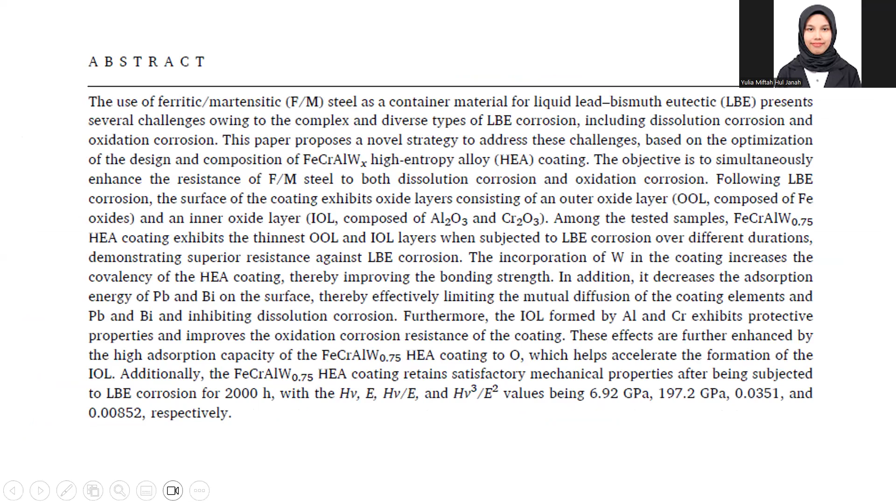About the abstract: the use of ferritic martensitic steel as a container material for liquid lead bismuth eutectic (LBE) presents several challenges owing to the complex and diverse types of LBE corrosion, including dissolution corrosion and oxidation corrosion. This paper proposes a novel strategy to address this challenge based on the design and composition of a ferrochromium aluminum tungsten high entropy alloy (HEA) coating. The objective is to simultaneously enhance the resistance of FM steel to both dissolution corrosion and oxidation corrosion.

Following LBE corrosion, the surface of the coating exhibits an oxide layer consisting of an outer oxide layer (OOL) composed of iron oxides, and an inner oxide layer (IOL) composed of aluminum oxide and chromium oxide.

Among test samples, the ferrochromium aluminum tungsten x equals 0.75 HEA coating exhibits the thinnest OOL and IOL layers when subjected to LBE corrosion over different durations, demonstrating superior resistance against LBE corrosion. The incorporation of tungsten increases the covalency of the coating, thereby improving the bonding strength. In addition, it decreases the adsorption energy of lead and bismuth on the surface, thus effectively limiting the mutual diffusion of the coating elements with Pb and Bi, inhibiting dissolution corrosion.

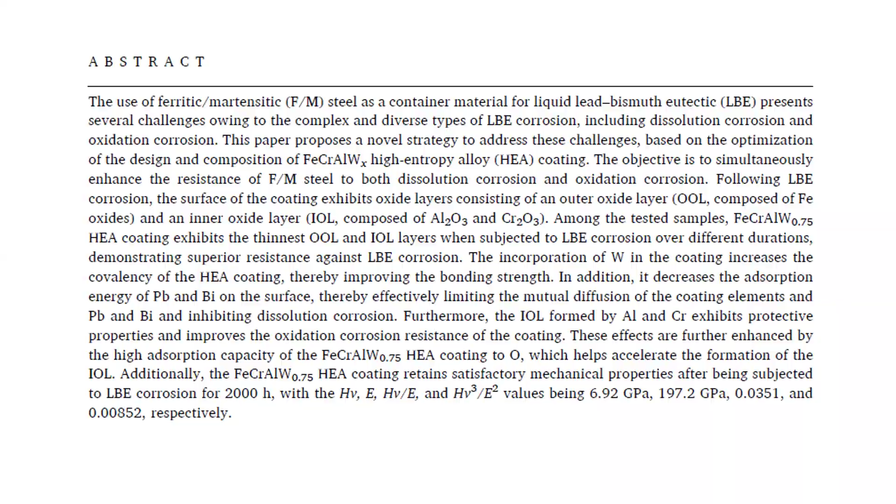With hardness, elastic modulus, H/E, and H cubed over E squared values being 6.92 gigapascals, 197.2 gigapascals, 0.0351, and 0.00852 respectively. So about the introduction: we know that LBE is used as a coolant in Gen 4 reactors.

LBE is a promising coolant for accelerator-driven subcritical systems in generation four nuclear reactors. Advantages include low melting temperature, high boiling temperature, excellent gamma shielding, and good neutronic properties. Challenge: LBE can cause severe corrosion in ferritic martensitic steel at high temperatures, like 550 degrees Celsius, leading to degradation in mechanical properties.

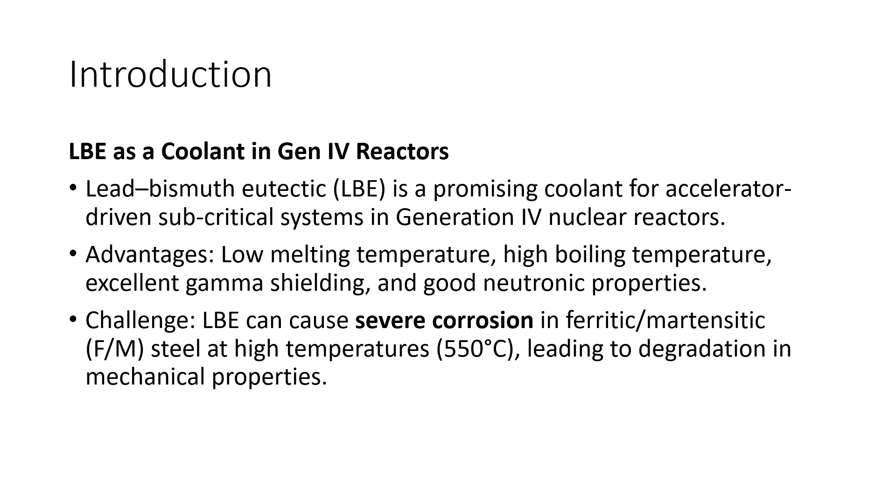So there is a need for corrosion protection strategies. Surface coating provides an effective non-destructive method to enhance LBE corrosion resistance of FM steel. Two types of coatings are studied: one is ceramic coatings, like aluminum oxide, yttrium oxide, silicon carbide. These are good for corrosion resistance but suffer from poor adhesion and low thermal conductivity.

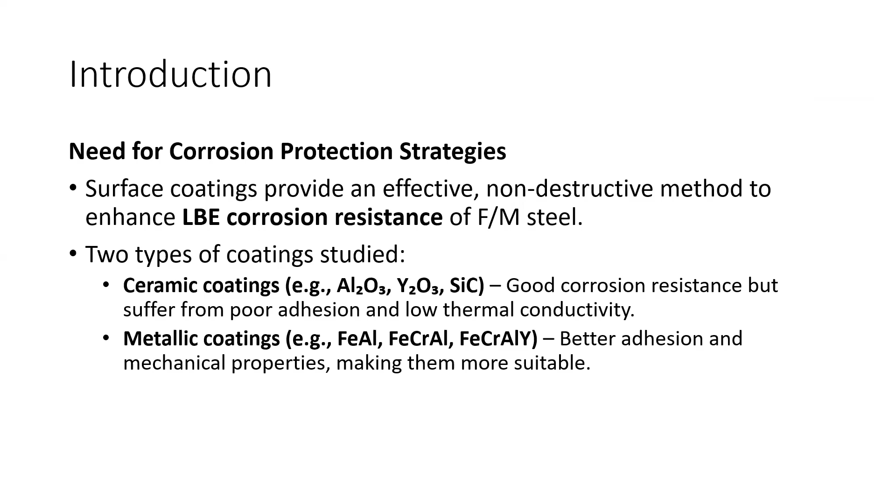The second type is metallic coatings, like iron-aluminum, ferrochromium-aluminum, ferrochromium-aluminum-yttrium. These have better adhesion and mechanical properties, making them more suitable.

High entropy alloy (HEA) coating is a solution. HEA is a novel metallic coating with multi-principal element structures, offering superior mechanical and corrosion-resistant properties. The key benefits are the high entropy effect, lattice distortion effect, sluggish diffusion effect, and cocktail effect.

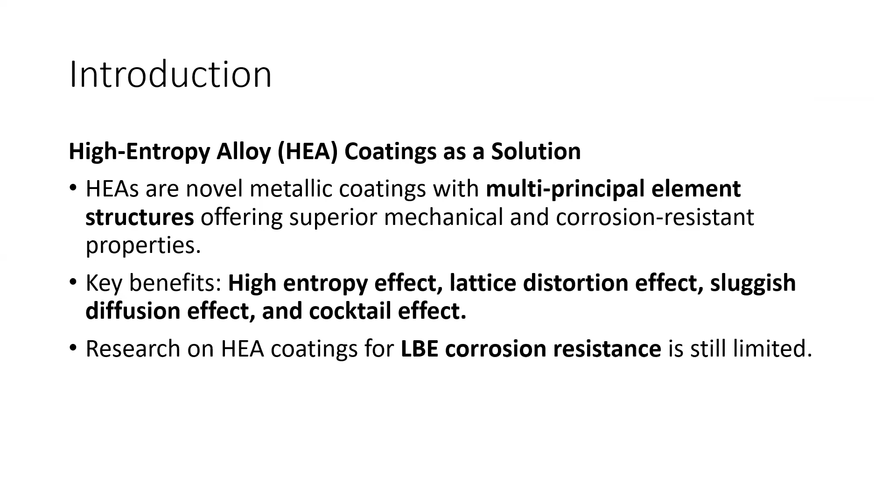Research on HEA coatings for LBE corrosion resistance is still limited. The challenge in existing HEA coatings: we know that existing HEA coatings form a protective oxide layer, like aluminum oxide or chromium oxide, to resist oxidation. However, dissolution corrosion remains a critical issue when exposed to LBE at high temperature.

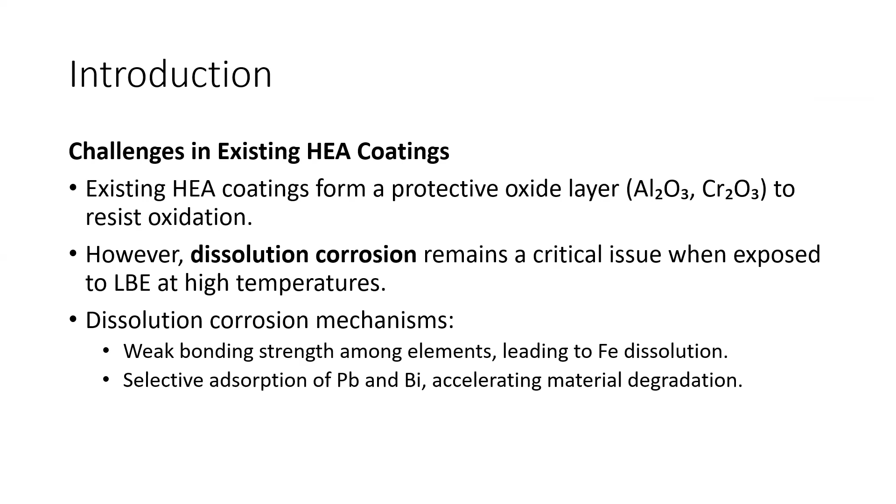Dissolution corrosion mechanisms: first, weak bonding strength among elements leading to iron dissolution. Second, selective adsorption of Pb and Bi accelerating material degradation.

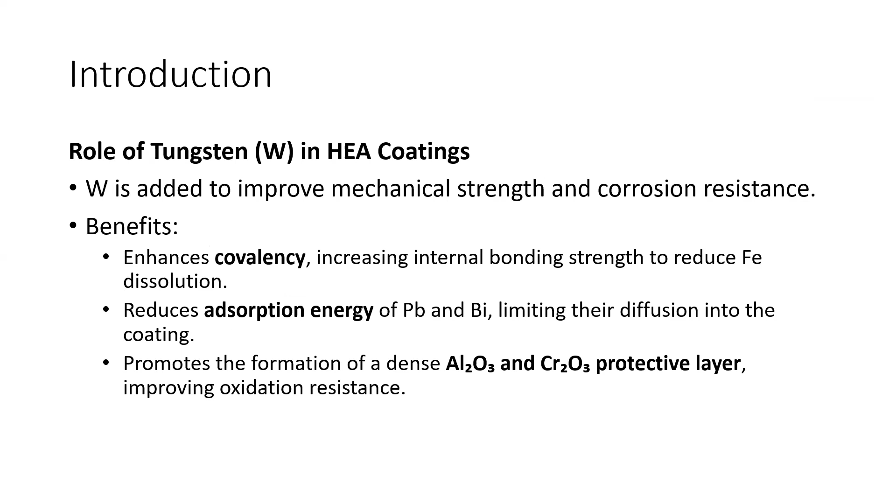The role of tungsten in HEA coating is to improve mechanical strength and corrosion resistance. The benefits are: enhanced covalency, increased internal bonding strength to reduce iron dissolution, reduced adsorption energy of Pb and Bi limiting their diffusion into the coating, and promoting formation of a dense aluminum oxide and chromium oxide protective layer, improving oxidation resistance.

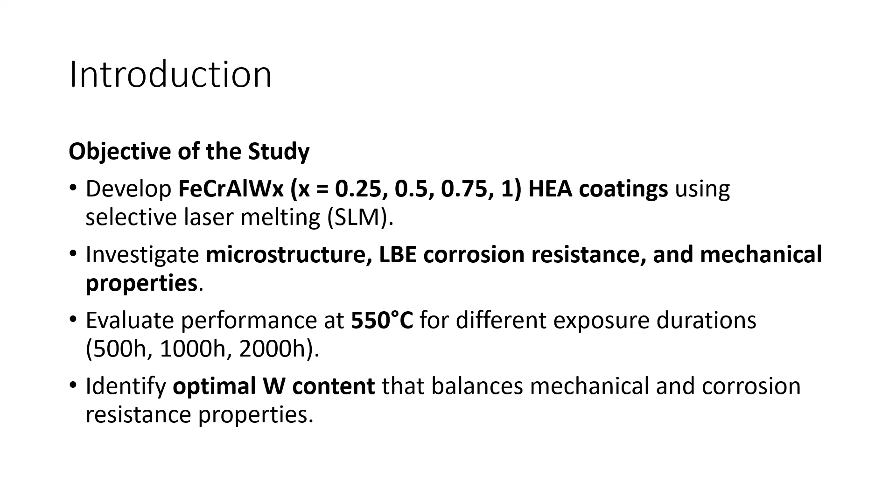The objectives of the study are to develop ferrochromium aluminum tungsten coatings with x equal to 0.25, 0.5, 0.75, and 1 HEA coating using selective laser melting (SLM); to investigate microstructure, LBE corrosion, and mechanical properties; to evaluate performance at 550 degrees Celsius for different durations like 500 hours, 1000 hours, and 2000 hours; and finally to identify the optimal tungsten content to balance mechanical and corrosion resistant properties.

Experimental procedure: first, preparation and characterization, material and coating fabrication. In this method, we use ferrochromium aluminum with different tungsten content coatings applied on FM steel. Selective laser melting is used to achieve high density, uniform coatings.

For the characterization techniques, to see the microstructure, we use SEM, EDS, and XRD for morphology, composition, and phase analysis. For mechanical properties, we use nano indentation for hardness and adhesion.

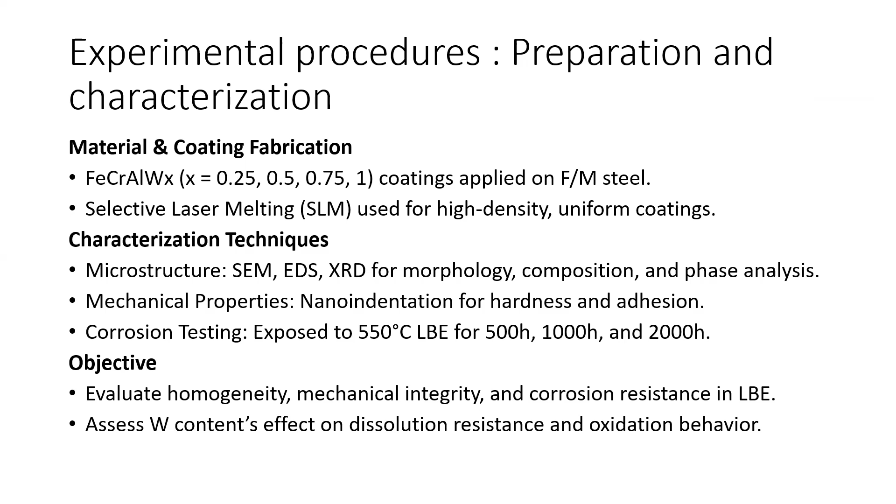About corrosion testing, we expose samples to 550 degrees Celsius LBE for 500 hours, 1000 hours, and 2000 hours. The objective is to evaluate homogeneity, mechanical integrity, and corrosion resistance in LBE.

Assess tungsten content effect on dissolution resistance and oxidation behavior. For the LBE corrosion test, we exposed coating to LBE with this variation. We can see in figure 1 the schematic diagram of the experimental device used for LBE corrosion.

This is the core setup, this is the PbBi. In this crucible we have the sample, then the LBE. We put this crucible into the furnace and use a temperature of 550 degrees Celsius, conducted in a controlled oxygen environment to study oxidation and dissolution behavior, with mass measurement to assess corrosion resistance.

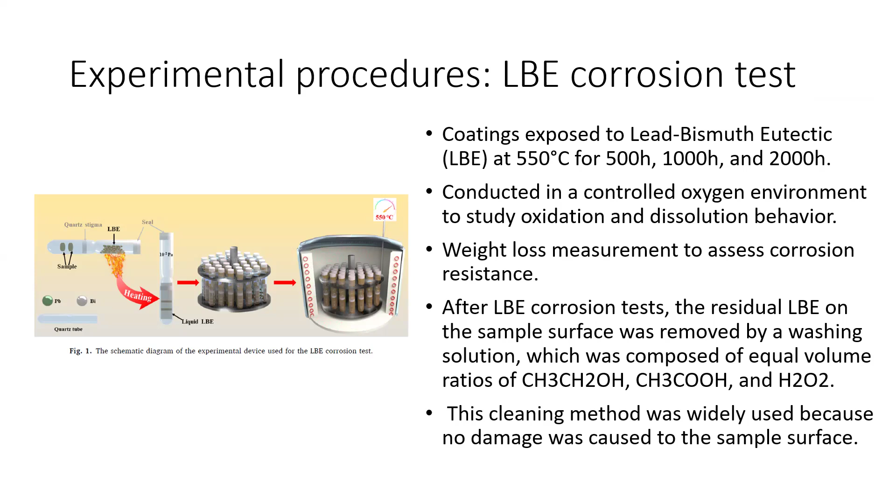For the mechanical test, we conducted testing using the HXD-100 TM machine from China with a 1,000 gram load and a dwell time of 20 seconds, performed with a TI980 nanoindenter from Bruker Hysitron to measure the relationship between elastic modulus and indentation depth.

The spacing between indentations was greater than 100 micrometers. A diamond tip was used to indent vertically to a depth of 1000 nanometers. The loading rate was 0.1 per second with a hold time of 10 seconds. All tests were performed in 5 parallel sets, and the average value from these points was reported for each sample.

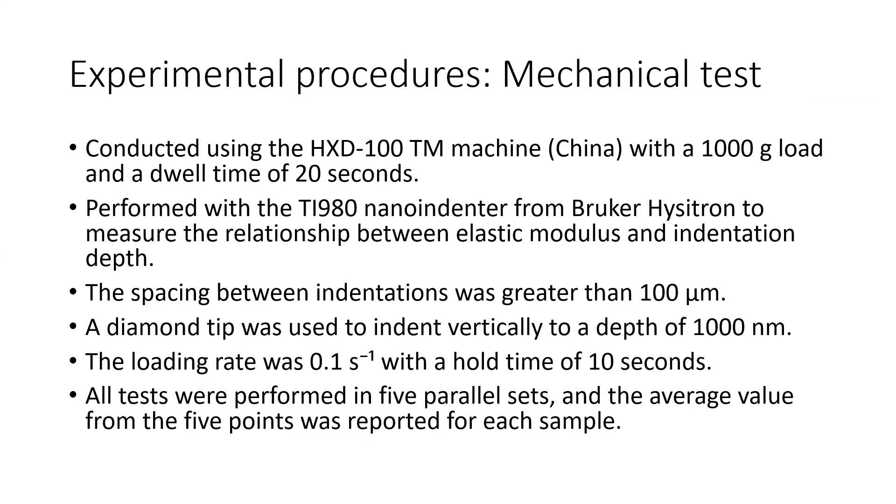For the results, first is composition and microstructure. The coating exhibits a body center cubic (BCC) structure with main peaks observed at 44.5 degrees, 64.4 degrees, and 81.8 degrees, corresponding to the (110), (200), and (211) crystal planes respectively.

Tungsten and chromium are more concentrated in the A-part, whereas iron is more abundant in the B-part, consistent with the EDS results.

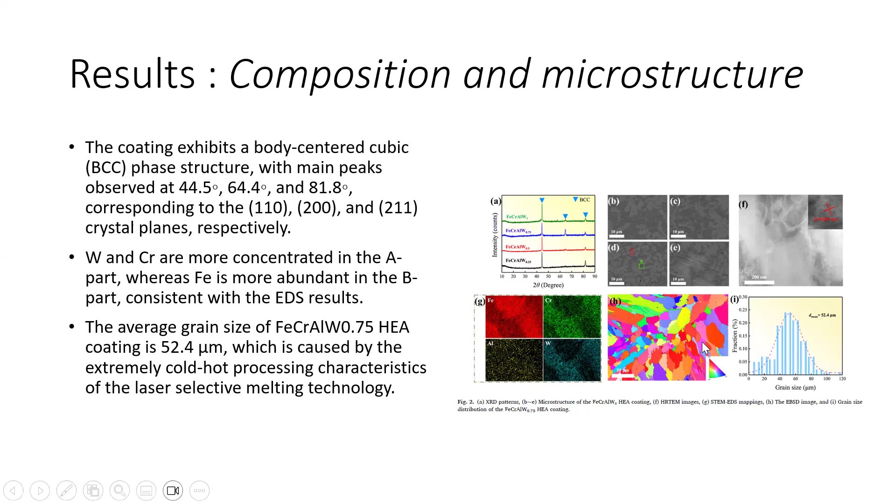The average grain size of the FeCrAlW0.75 HEA coating is 52.4 micrometers, which is caused by the extremely rapid cooling characteristic of the laser selective melting technology.

From table 1, we can see the proportion of the dendritic structure increases with the increase of tungsten content. This unique metallographic structure is attributed to the unequal melting points of the elements in the FeCrAl-W coating.

From table 1, the contents of high melting point elements chromium and tungsten are higher than those of the lower melting point element iron in the A-part, whereas the opposite is true for the B-part.

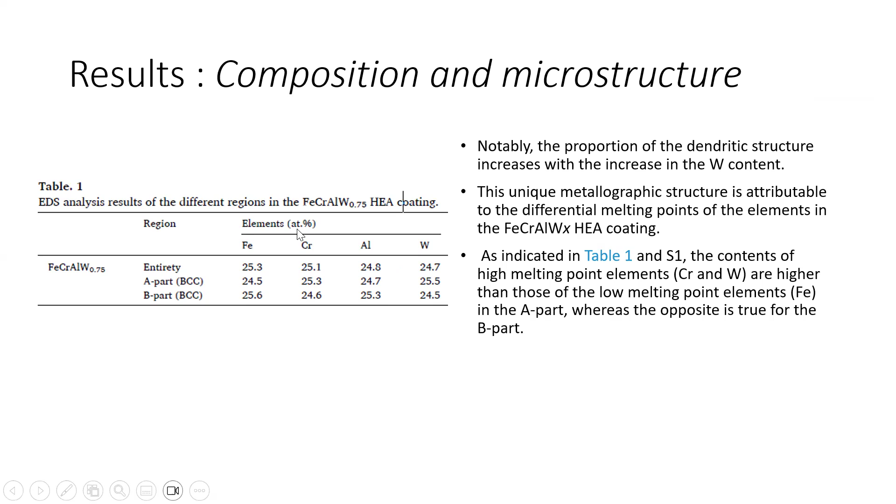Now we talk about LBE corrosion behavior. The F/M steel surfaces exhibit typical porous oxide accumulation and gradually formed a less protective oxide layer with increased corrosion time. The oxide layer on the FeCrAlW0.75 HEA coating surface exhibits this dense structure mainly composed of aluminum oxide.

As the LBE corrosion process continues, the sample coating retains the dense morphology shown in figure 3E and F. The addition of tungsten in the sample coating limits iron diffusion and contact with oxygen, inhibiting the generation of less protective iron oxide on the surface and increasing diffusion activation energy.

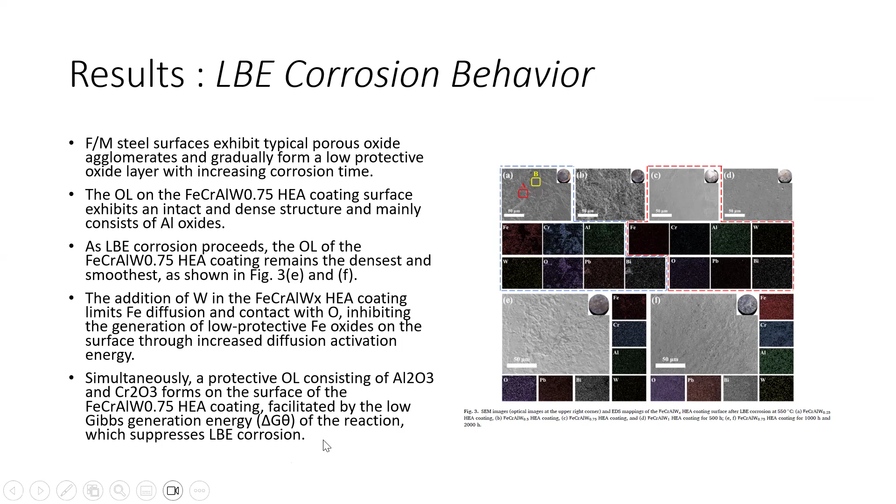The oxide layer likely has a double layer structure with a porous outer oxide layer (OOL) and a dense inner oxide layer (IOL). However, due to the large Pilling-Bedworth ratio (PBR) of the iron oxide, it exhibits insufficient protection, resulting in OOL peel-off and exposure of the IOL.

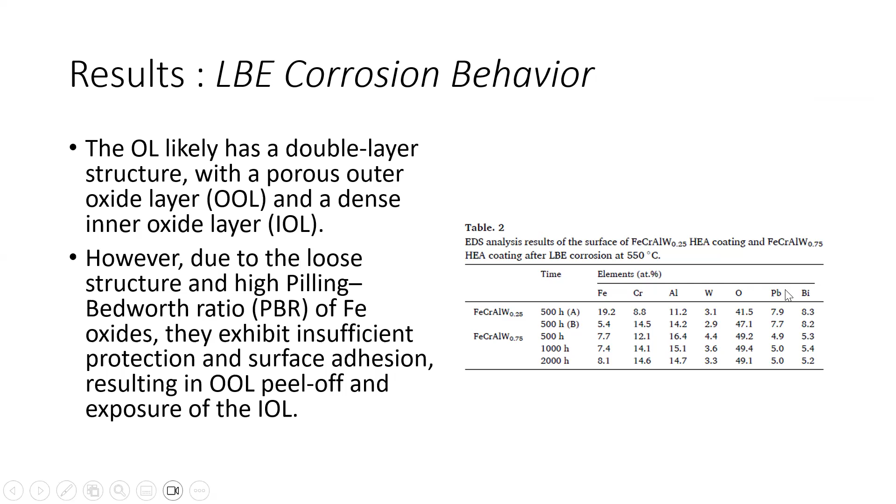This table shows the EDS analysis results. We can see the different elements at different exposure times.

As LBE corrosion progresses, the diffraction peak of the OL surface of the sample coating transitions from aluminum oxide to multiple oxides including aluminum oxide, chromium oxide, and iron oxide, among others.

You can see this. The XPS photoelectron spectroscopy best shows the results for Fe, Cr, Al, W, O, Pb, and Bi on the surface of the material coating after the liquid LBE corrosion test.

High resolution XPS spectrum of Fe 2p, which shows peaks corresponding to Fe2+ and others respectively. This outcome validates the existence of two distinct Fe valence states in line with the XRD findings.

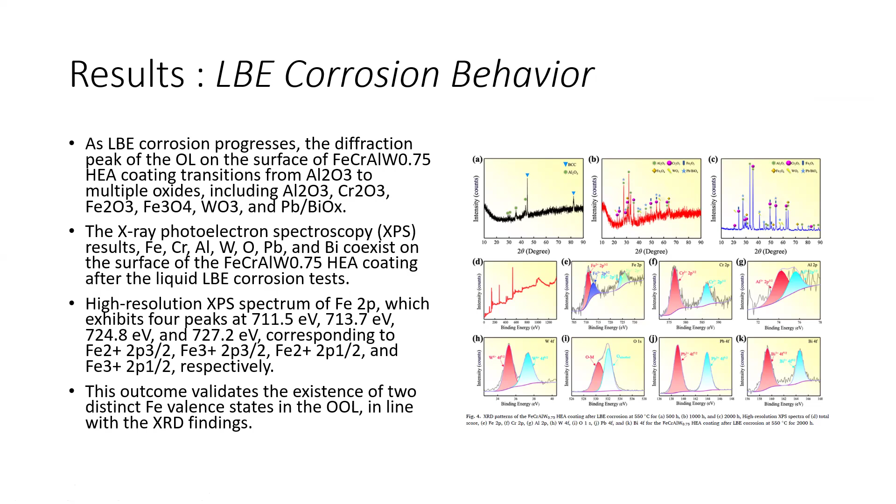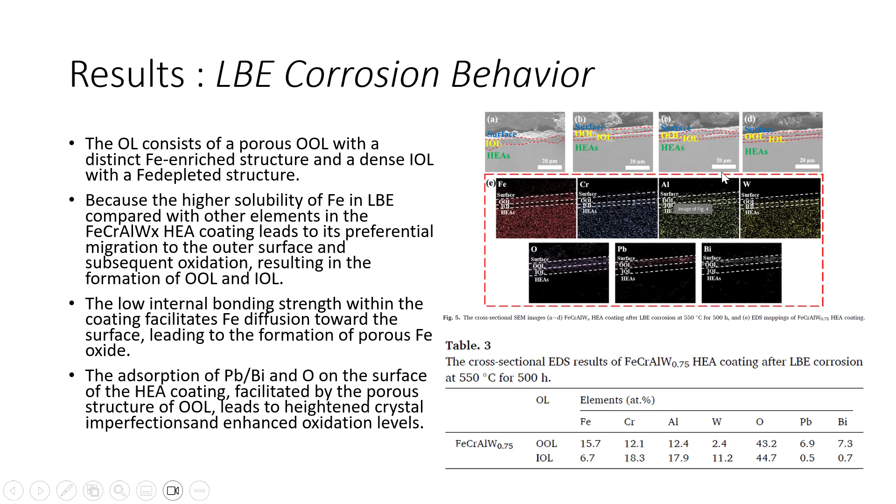We can see in this figure the concentration profile from the outer oxide layer to the inner oxide layer. The adsorption of Pb/Bi and oxygen on the surface of the HEA coating, facilitated by the porous structure, is accompanied by high-density crystal imperfections in the oxidation layer.

The thickness values of the oxide layer on the surface of the sample still increase with prolonged LBE corrosion time. Among them, the sample coating shows the lowest thickness of the oxide layer, and the relationship between oxide layer thickness and corrosion time indicates the oxidation conforms to a parabolic growth law.

With the parabolic oxide growth, the rate of the HEA coating is defined in equation 1: d squared equals Kp times T, where D is the total oxide scale thickness, Kp is the parameter in micrometers squared per hour, the parabolic oxide growth rate constant, and T is the corrosion time.

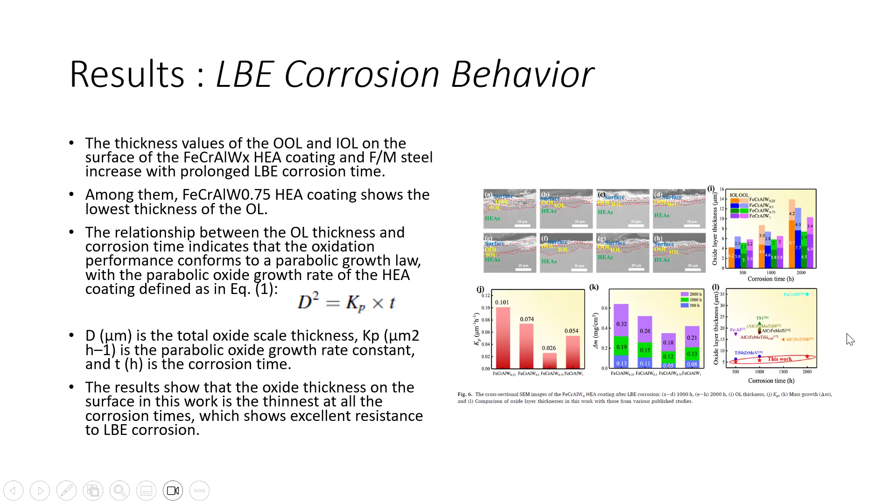So the results show that oxide thickness on the surface is the smallest over the corrosion time duration tested, showing excellent resistance to LBE corrosion.

And the result about mechanical properties after LBE corrosion: the hardness, elasticity modulus, and Vickers hardness of the material coating increase as tungsten content increases, owing to the increased covalency of the coating.

You can see from this figure, in terms of this parameter, the material coating exhibits superior mechanical properties with higher HV per E, like 0.0352, and HV cubed per E squared is 0.0101, compared to the other coatings.

So the material coating exhibits the lowest rate of hardness recession, indicating that it retains its mechanical properties during long-term service, thus ensuring service stability. The E, H, H per E, and H cubed per E squared values of the material coatings remain...

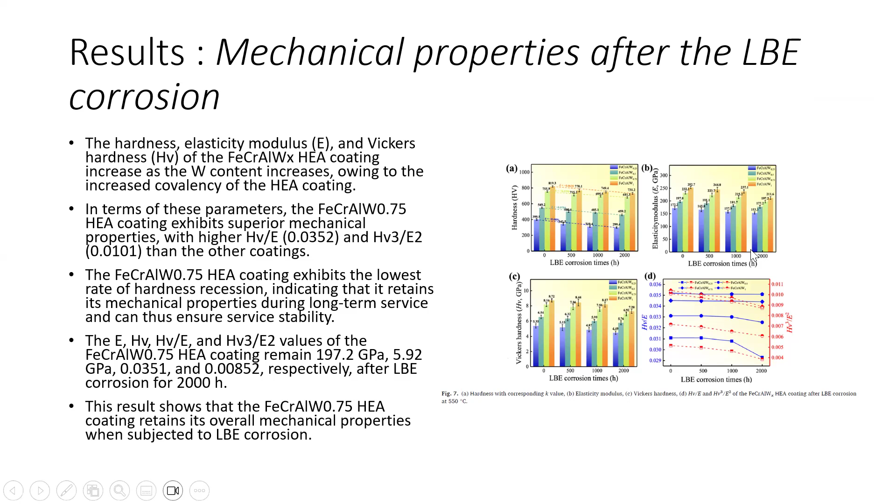This result shows the material coating retains its overall mechanical properties when subjected to LBE corrosion. So we move to the discussion section of this paper.

The crystal structure model and electron localization function (ELF) of the material, where the constituent elements are randomly distributed, uses a special quasi-random structure model.

With increased tungsten content, the coating experiences an escalation in covalent bonding, signifying bolstered internal bond strength. The coating effectively mitigates the dissolution of Fe in LBE, thereby reducing the growth rate of the outer oxide layer. The Eads value for oxygen atoms becomes more negative with increasing tungsten, indicating strong adsorption capability toward oxygen and oxidation rates.

The protective inner oxide layer can further slow down dissolution corrosion.

So the material coating exhibits the lowest Kp values, and the thickness of the inner oxide layer in the material coating is thinner than other tungsten variations.

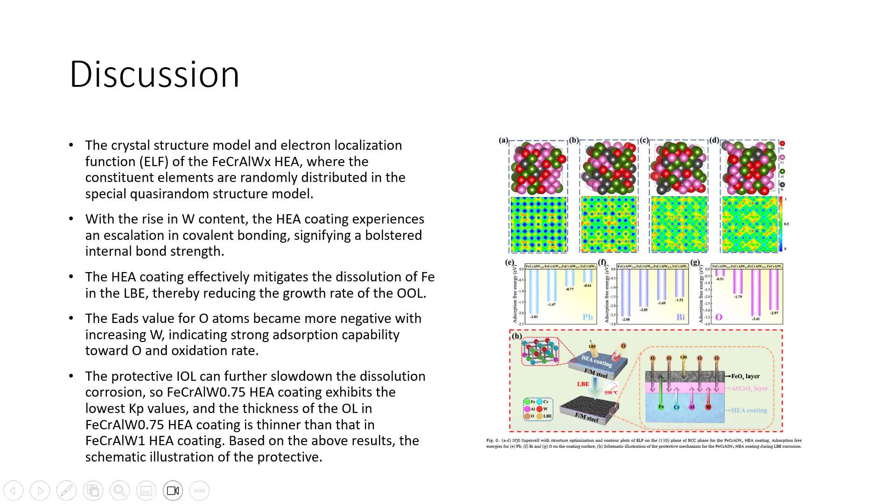Based on the above results, here is the schematic illustration of the protective mechanism. So the conclusion from this paper is: one, the thickness of the outer and inner oxide layers on the surface of the FeCrAl-W-X coating increases with the increase of LBE corrosion time.

Among the FeCrAl-W-X coatings, FeCrAl-W 0.75 coating demonstrates the thinnest outer and inner oxide layers under the reference corrosion duration, indicating the highest resistance to LBE corrosion.

PbBi is thereby kept from causing dissolution corrosion. Furthermore, the preferential formation of aluminum oxide and chromium oxide, owing to their lower delta G0, contributes to the formation of a protective inner oxide layer, imparting excellent oxidation and corrosion resistance.

Owing to the optimal LBE corrosion resistance, the material coating exhibits the slowest decline in mechanical properties after corrosion among the tested samples. After 2000 hours, the HV per E and HV cubed per E squared values for the material coating were the highest among the prepared coatings.